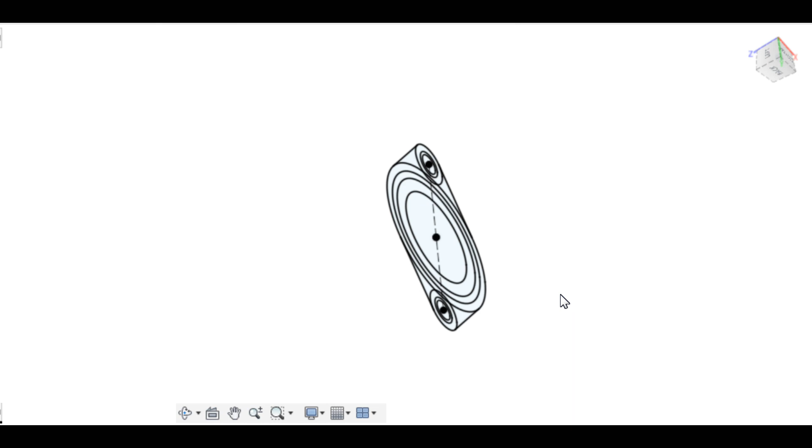So, as you may have seen in the last video, this is the component we're trying to make. It's just a spacer block. Nothing fancy, but the thing is, the original one was a plastic or some sort of Bakelite. Can't really say, but it deformed and cracked. They only had one, got two engines, so they needed one anyway. And it was just a case of using a suitable material to replace it.

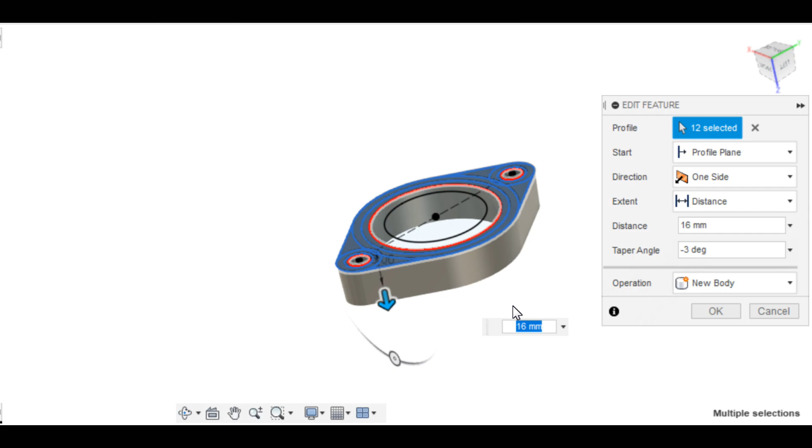So the options we looked at were 3D printing one, casting one out of some sort of resin, I've got access to loads of different types of resin, and casting one from aluminium. So the first option was 3D printing. Well, I was worried that the temperature of the engine block was going to be enough to start deforming the plastic. Now, considering the original, which was made for the purpose, had already deformed, I figured that 3D printing was not going to be suitable.

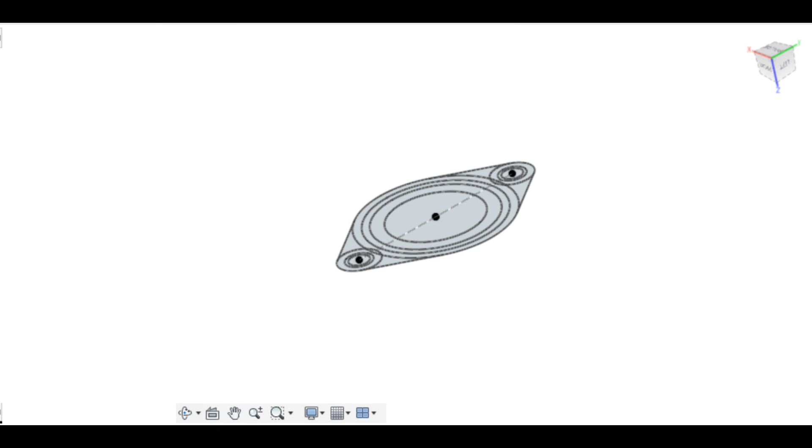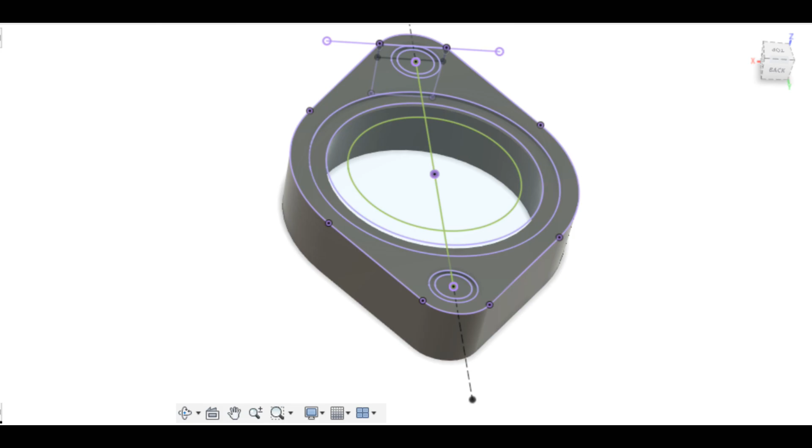So that left us two options: casting in aluminium or casting in a resin. As such, I set about designing all three components really in the CAD. Designing the actual component we were going to make, and then I could use that to create the patterns for an aluminium casting or the mould for a resin casting.

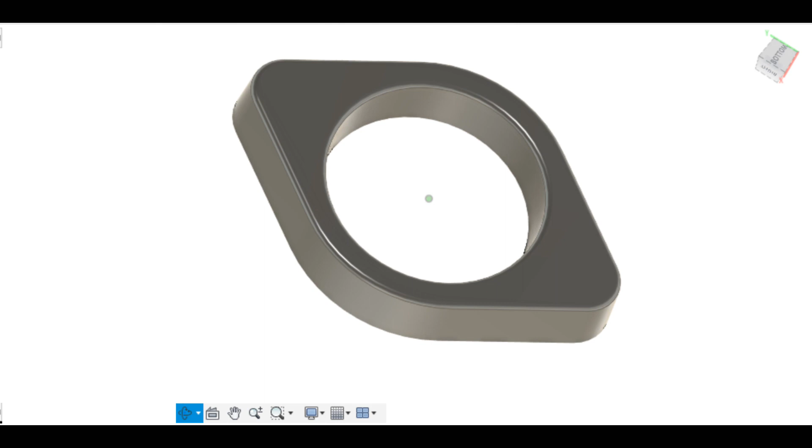So you can see here I've taken the part and blanked off the components, so this would be an aluminium casting. Obviously making holes is doable, but small holes is just a hiding to nowhere really. It's just a pain in the arse. Whereas on the other hand, with resin you can pretty much make it out of the box ready to fit.

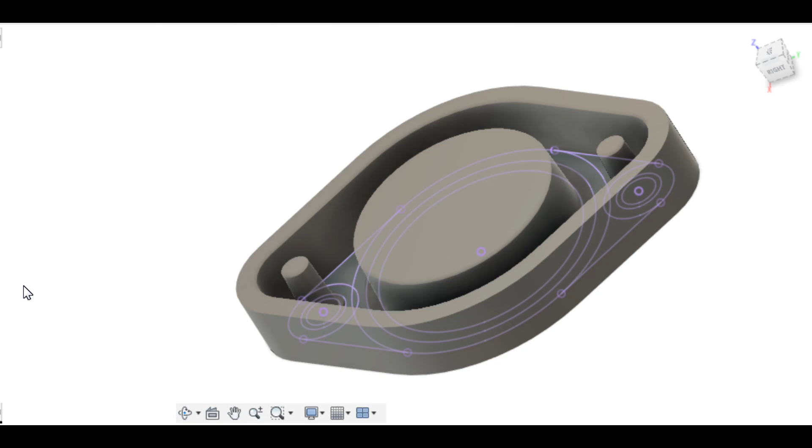So this is the resin moulding box, and to all intents and purposes it just looks like a mirror image of the component we need. The only difference is the tapers in the holes. As you can see, the two holes that were going to be for drilling once the final dimension was there could be put in place. Now these could be drilled out and moved slightly, as at the beginning we didn't have a true dimension of those holes.

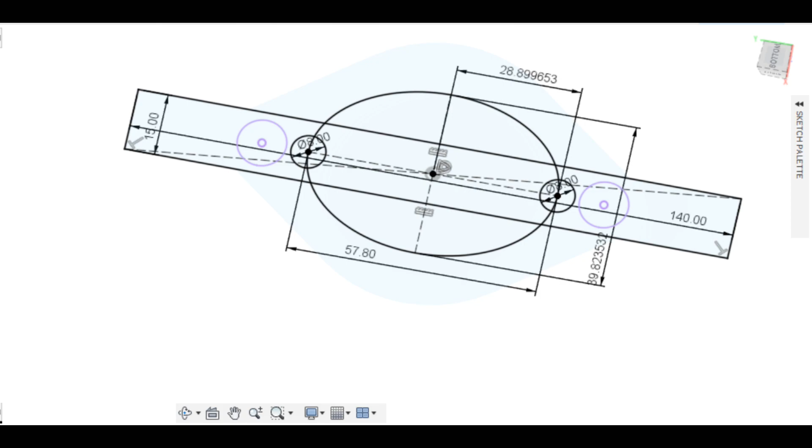So with the casting option, as I explained before, I went for a blind riser. In hindsight, I would have done it slightly differently, because I tried to make a securing platform to actually do the machining as well. I'm still not entirely sure even now how I would have tackled it differently. The blind riser would have been made slightly differently, I think, because it would have made it easier to machine off.

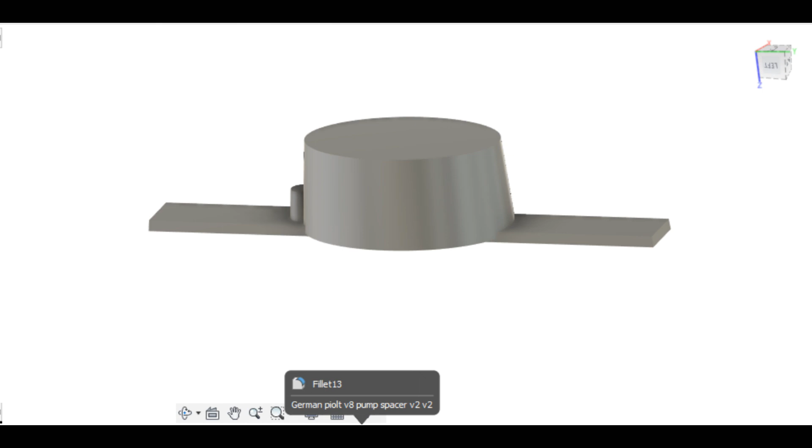But holding the component while I machined it, I'm not quite so sure. I'll have some feedback on that. If anybody knows how that would have been best to hold during machining, please let me know.

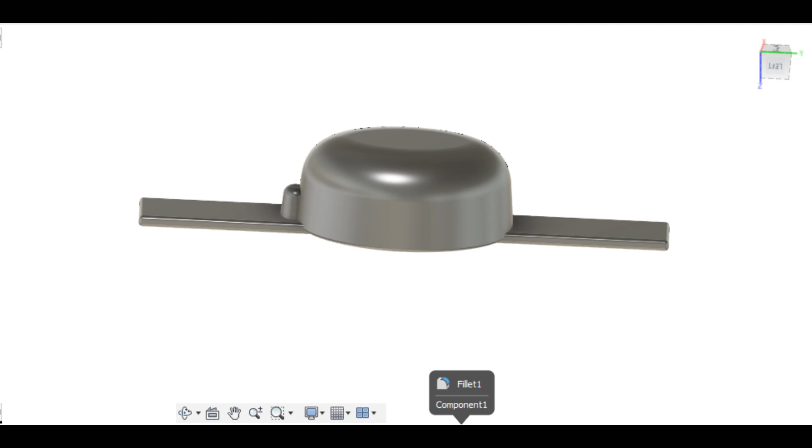But the blind riser is there purely and simply to feed the component, and because it's round shaped with a hollow centre, you have to try and feed as much of it as possible, so you feed the two larger ends. Now, I'm not here to teach you how to do CAD work, especially on something as simple as this, but as you can see, it's simply a set of circles that have all been made for the separate components that are required. Even the oval kind of shape, I say oval, I'm not quite sure what you would actually call that, a diamond oval if you like, it's purely formed out of circles and 4 straight lines.

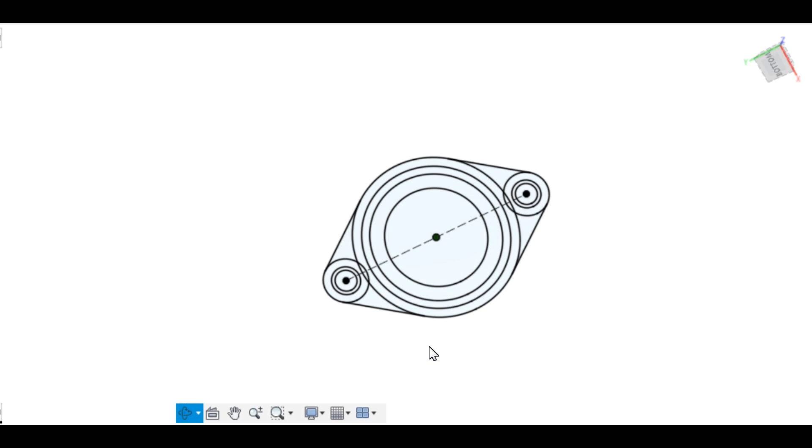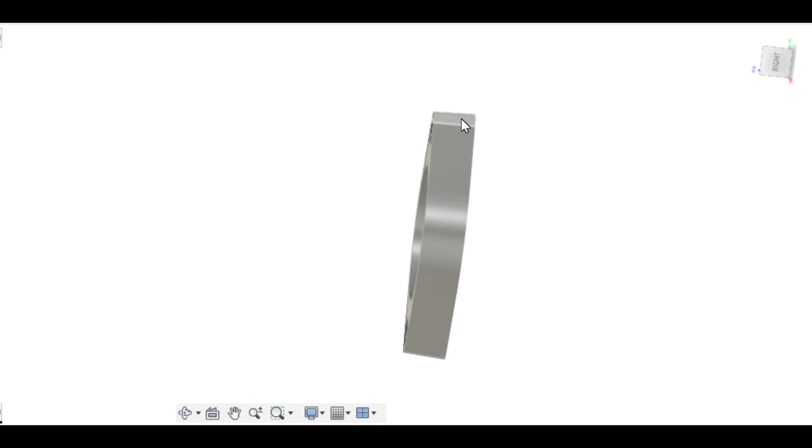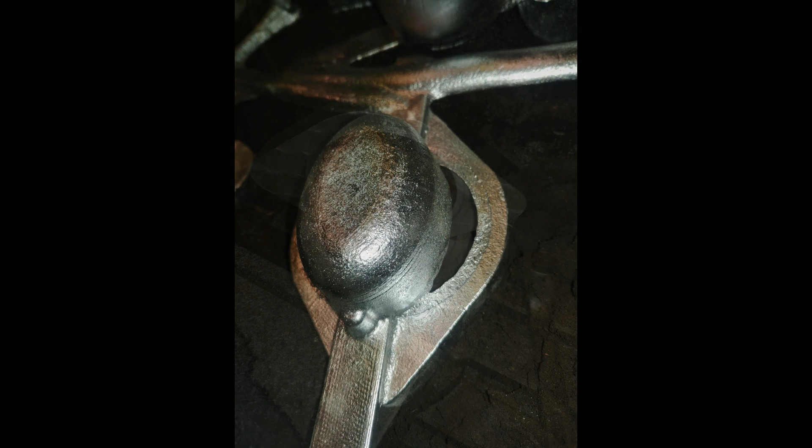Now the biggest problem you have to come across in designing for cast work is draft. Everything has to have a draft. Pulling straight edges is possible, but it's extremely difficult, time consuming, and generally leads to nothing but trouble. You need at least 3%. I try to put about a 5% taper on everything. You don't have to design the gates. Generally speaking, they can be done later on.

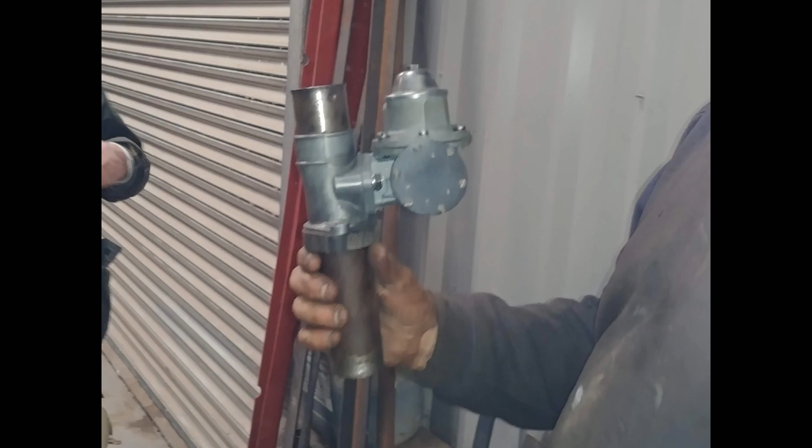And realistically, in CAD work, it's all about designing the component to do the job during casting. Thereon, it's down to the pattern making, whether you print it, make it out of wood, or whether you're sending it off to be pattern made. I hope those little bits and pieces help if you're doing anything for casting work.